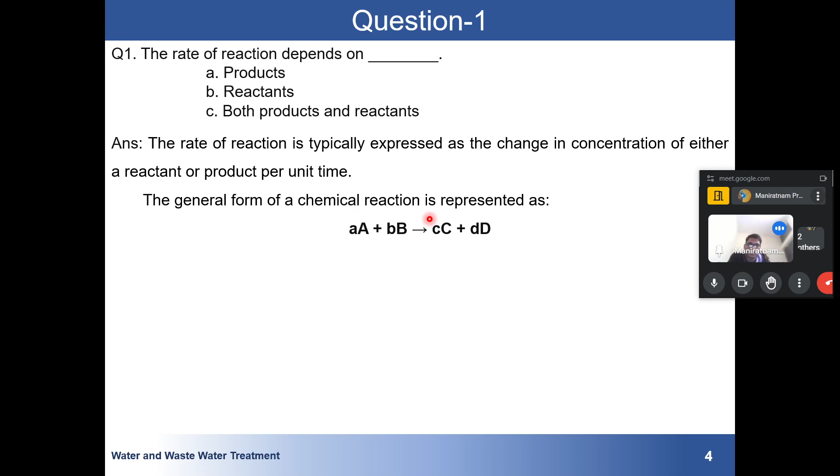So coming to chemical kinetics, the statement is that the rate of reaction is typically expressed as the change in concentration of either reactant or product per unit time. Now suppose there is one general reaction, where A reacts with B to form C and D, and small a, small b, small c, small d are the stoichiometry of this reaction. With time, A will react with B, and C and D will form.

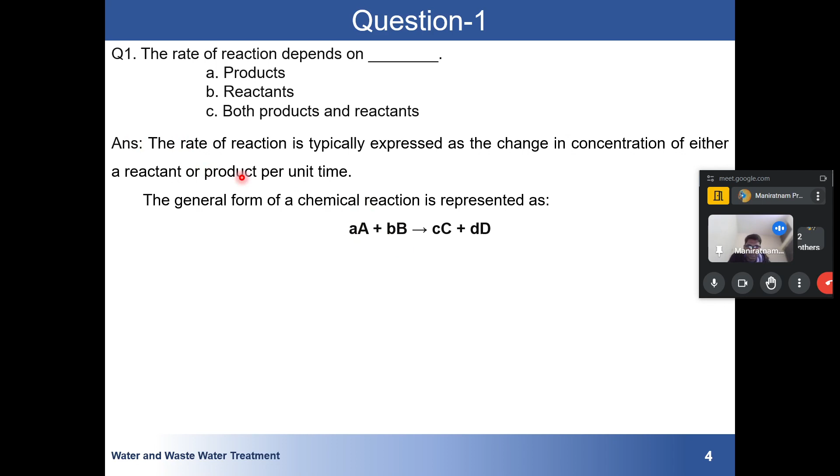So the concentration of A and the concentration of B will decrease, but at the same time the concentration of C and the concentration of D will increase. And how much these concentrations increase or decrease all depends upon the stoichiometry. The rate at which this decrease in concentration with time happens is expressed as dA/dt. So if you read the statement...

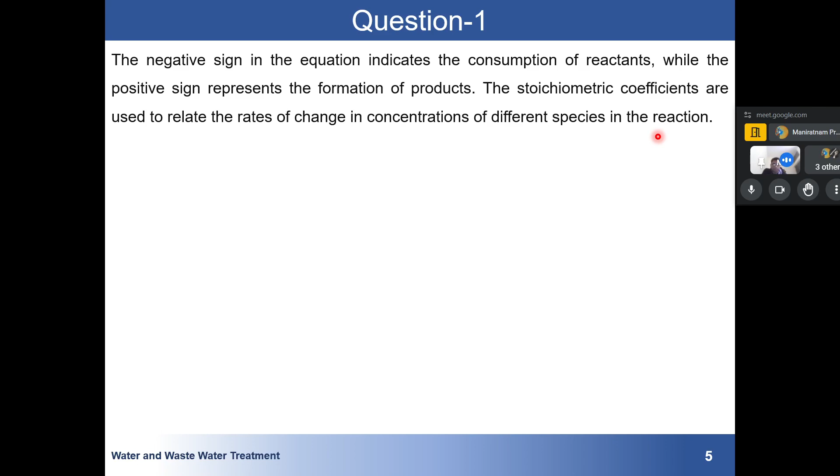As already said, the negative sign indicates the consumption of reactants, while the positive represents the formation of the products. And the stoichiometry is used to relate the rate of concentration of a species in the reaction. So how A is decreasing, how B is decreasing, all depends upon the stoichiometry and this rate. So the question: what does the rate of reaction depend upon? You can see this is a general reaction. So the rate of this reaction can be controlled by A, B, C, and D. So our correct option will be: the rate of reaction depends upon both products and reactants.

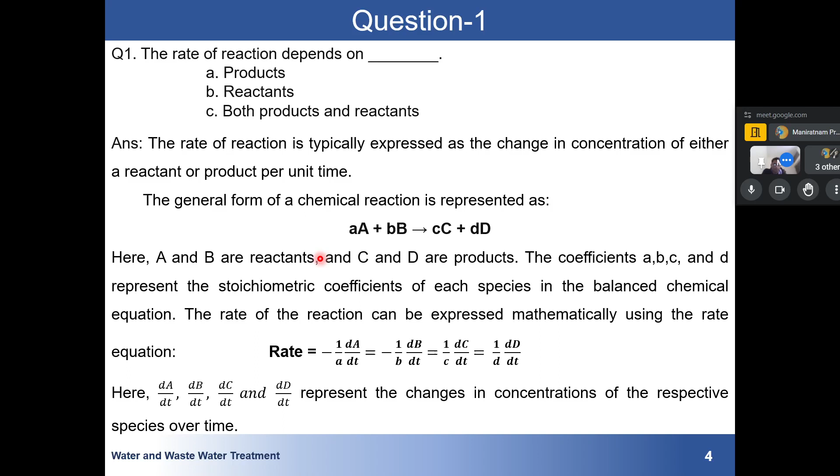So this is a simple question, but generally this is not asked. We always ask: if this is a reaction, what will be the rate of reaction with respect to capital A or capital B. But if someone says find the rate of reaction, you can use any of these four species, that is A, B, C, D, you can express it in any term. Depending upon the data given in the question, you can express the rate of reaction in any one of the species out of the given four. So the correct option for this will be C, that is, it depends upon both.

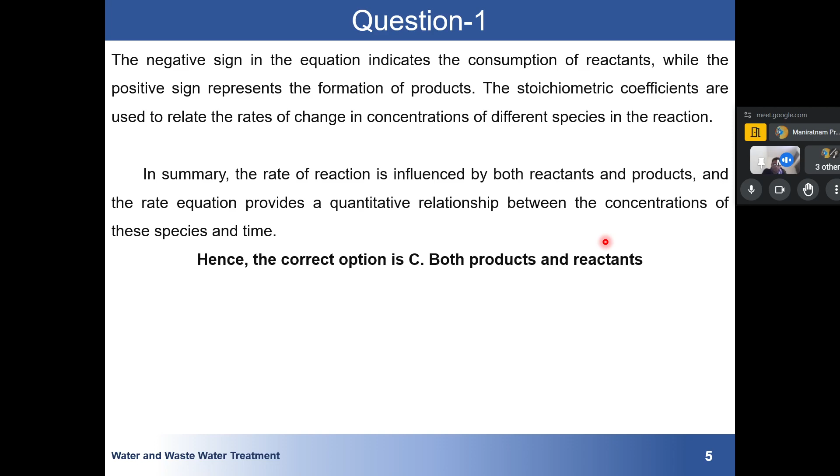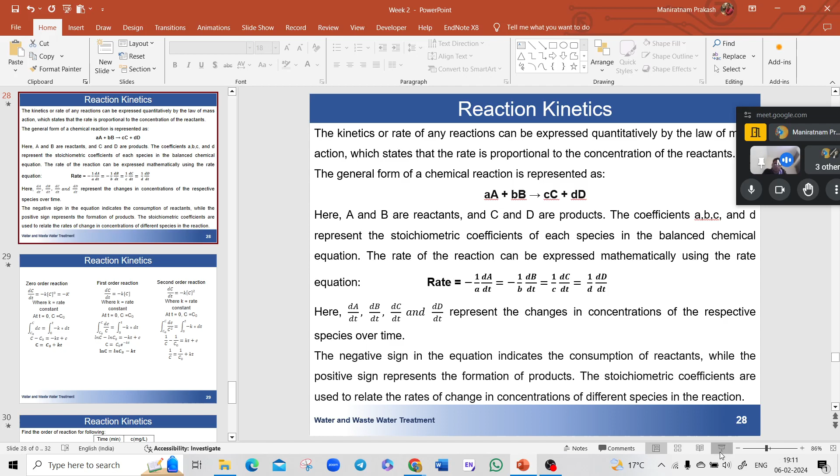Yeah, I will be explaining order of the reaction at the end, because first I'm discussing some basic questions, but I have some slides which I will be discussing at the end. Okay, since you have asked it, I will discuss it now. What is the order of reaction? Let me go to the last slide. I have already said that the reaction and stoichiometry will depend upon this.

So in reaction kinetics there are generally three. Now when this reacts with this, there will be some kind of order. Either the change in concentration will be directly proportional to this concentration, or it won't depend upon this concentration, or it will be the square of this concentration, or it can be of nth kind, that is called nth order. So for our study we generally take three kinds of order, that is zero order reaction, first order reaction and second order reaction.

I will refer one book from where I have collected all this material, all these equations. You can go to that book, and you will see that they have generalized all these things. They have not discussed zero order, first order, second order separately. They have just generalized it as nth order reaction. Suppose you have been given some set of reactions, and you are asked to find the order of this reaction. There are different methods discussed in that book. I will refer it after the end of this slide.

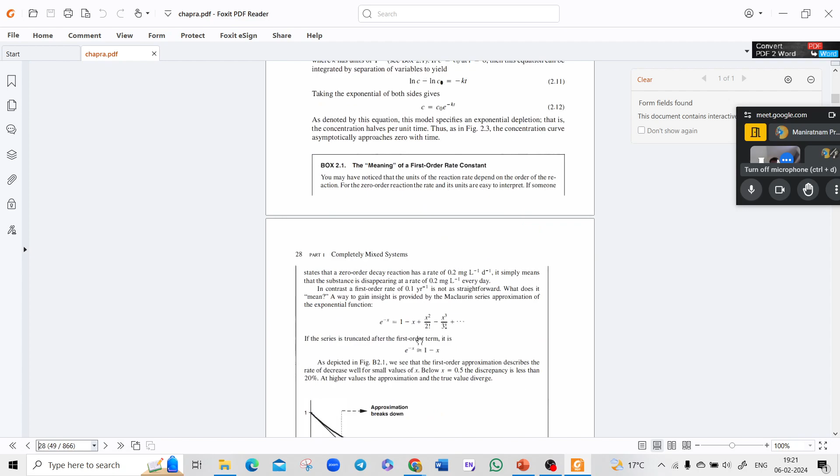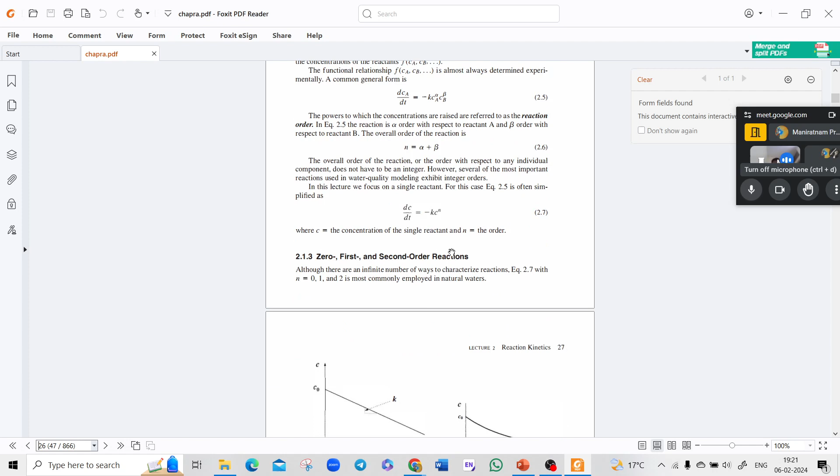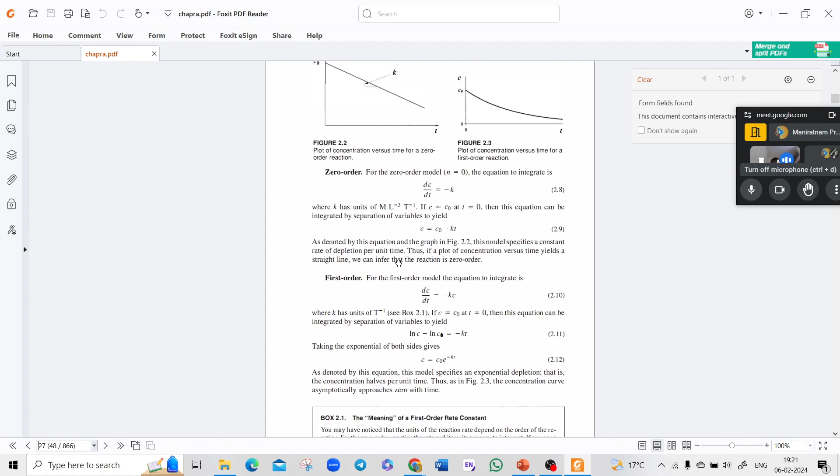So see here, first they have discussed this integration. They have discussed in the general modes. First they have discussed as usual zero order, first order, second order, because these are most common. So they have generalized the thing, and by generalizing it, they have tried to solve this by different methods. So your simple equation will be dc by dt is equal to minus k C to the power n, that is nth order reaction.

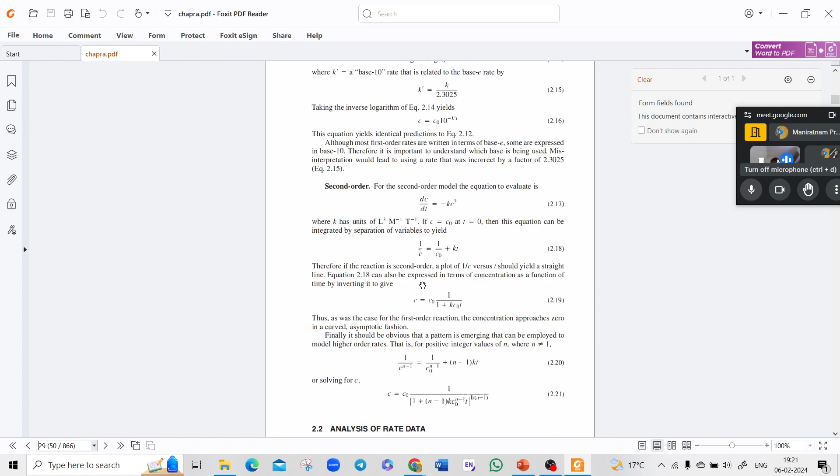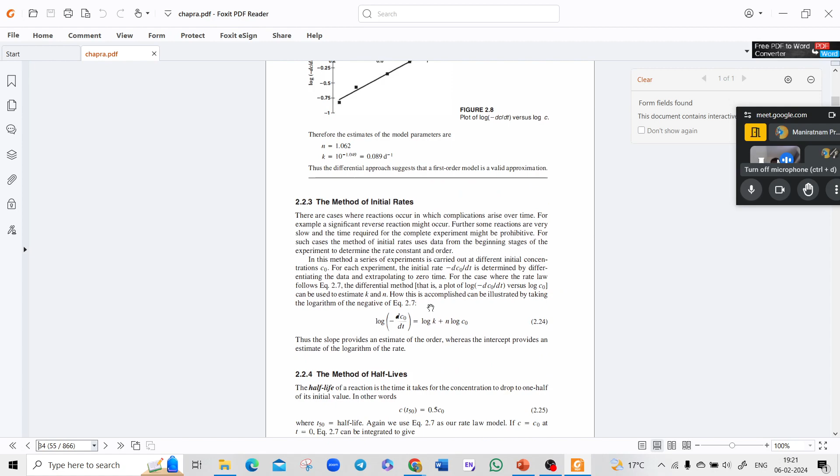So there are several methods to solve it, that is integral method, then differentiation method, method of initial rates, method of excess, so there are other methods. So if you are really interested to know more about chemical kinetics, please go through this book. This book is available on the internet. You can just type this Surface Water Quality Modeling by Steven Chapra PDF. You will get this PDF and you can read it.

So to get more control on these different kinds of reactor, that is CSTR, PFR, you should read this book, because most of the material that has been covered in your lecture has also been taken from this book only. And whatever derivation and examples I will be doing, I have also referred this book only. So whatever I am saying is present here. So it's my suggestion that please go through this book. Okay.

So now you have all three equations. There will be some general simple type of question asked, what is the equation for zero order reaction, first order reaction, second order reaction. The main question which comes is like one experiment has been performed and the data has been collected with time, that is 0, 0.5 minute, the concentration is this. So they are asking you to find the order of kinetics. Okay. So how will you solve?

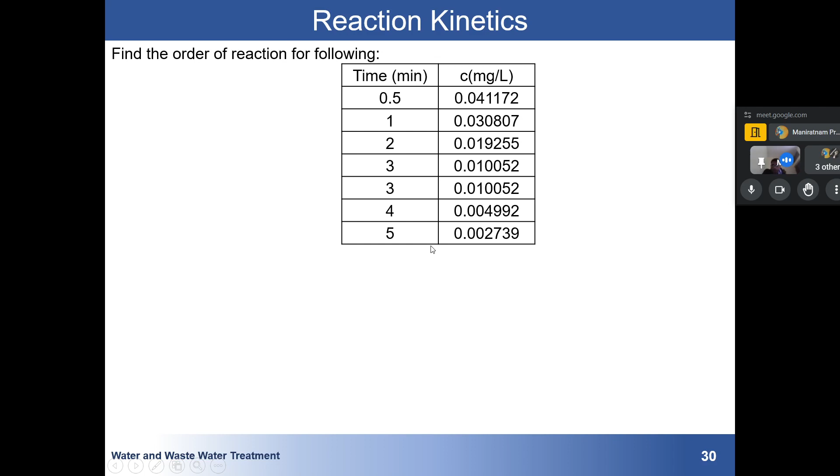So for solving this, we know that this is the equation for zero order reaction, this is the equation for first order reaction, and this is the equation for second order reaction. So I will take the help of Excel sheet. Generally in examination you won't be getting a laptop, so for how this question is solved manually, numerically, you can take the help of that book.

But suppose if you are doing some kind of research and you have done some experiment and you want to check what kind of order it is, then you can follow this method. So with time you have concentration. I know that if the reaction is zeroth order, C will be directly proportional to time. For first order, the ln of the concentration will be directly proportional to time. And for second order reaction, 1 by C will be directly proportional to time. So I will plot the graph of each one.

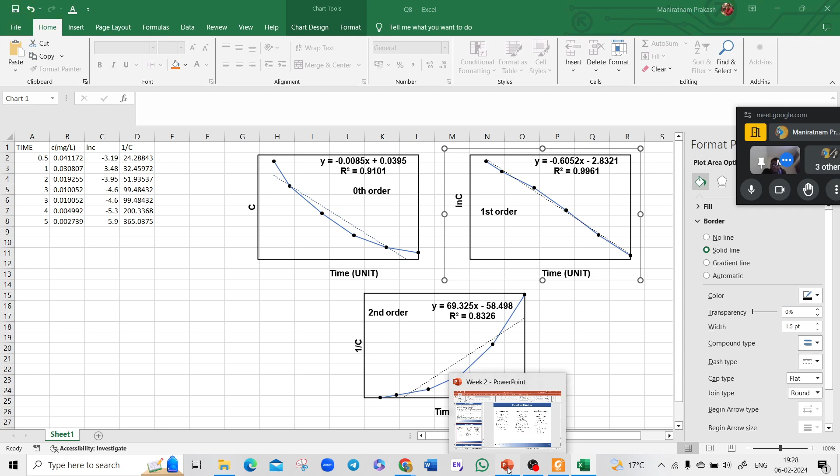So this was the graphical method, where you plot the graph and calculate the R square. Now suppose you don't have Excel and you cannot calculate R square for each one. Then what I have suggested is that you can take the help of this book. They have given some method: if you don't know the order of the equation, they have given instructions that if you do these steps, you will be able to know the order of kinetics.

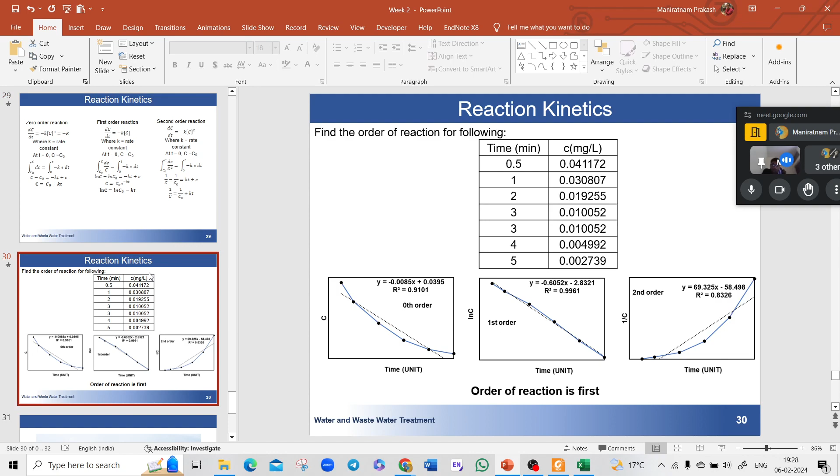So I hope this is clear to you. This was related to the first question, how to find the order of any reaction. Is it okay? If you have any doubt, you can ask now. Else, I will be going to the second question. Okay.

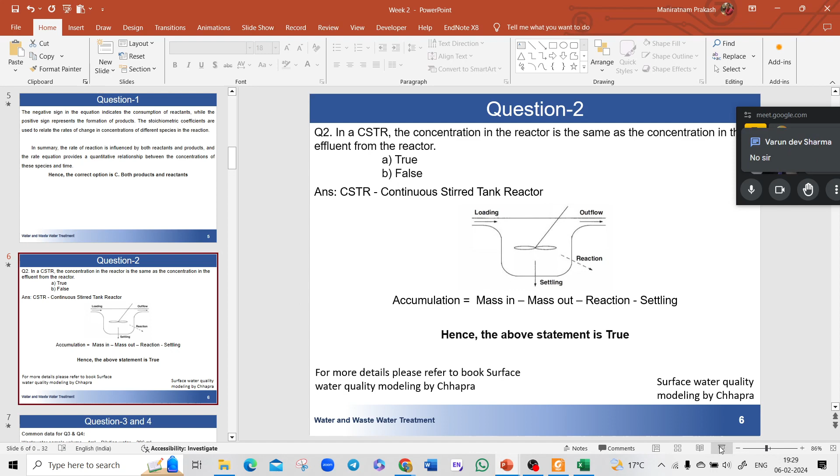So coming to the second question, that is, in a CSTR, the concentration in the reactor is the same as the concentration in the effluent from the reactor. So to answer this question, first you should know what a CSTR is. Actually this CSTR thing is very detailed. I cannot explain it in one class, because teachers take around 4 to 5 lectures to explain every concept of CSTR. But I will just give you a summary of how this CSTR works.

So CSTR stands for continuous stirred tank reactor. From the name, it already suggests that there will be a tank which will be continuously stirred. So how is this graphically represented? It is represented in this way. Consider any kind of control volume, any kind of lake. Some kind of loading, it can be wastewater loading, any kind of pollutant in the water, will go into the lake, any volume reactor, and it will be continually stirred, meaning continually mixed.

And there will be some kind of settling, and there will be some kind of reaction also. So initially there was a concentration of x, it will come here, and there will be some kind of reaction. That reaction can either increase the concentration of this pollutant or decrease the concentration of the pollutant, or similarly there can be some kind of settling.

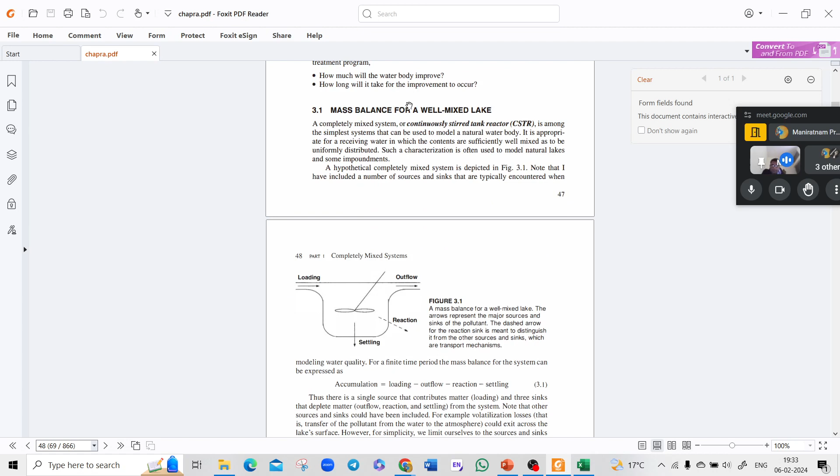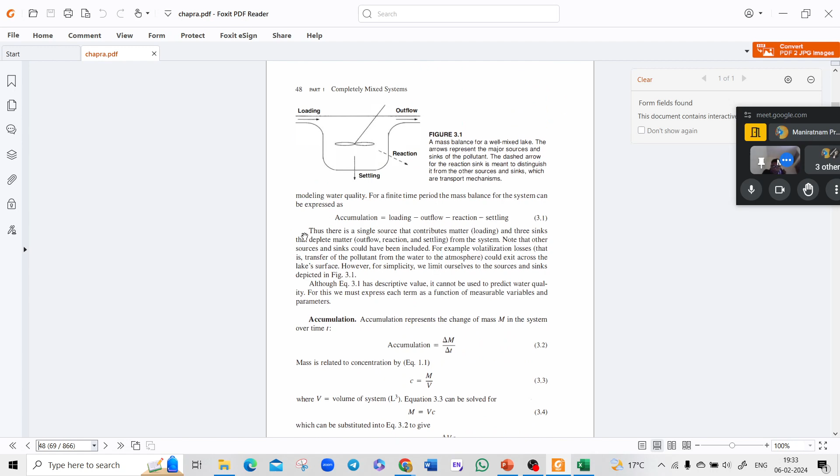For more detail, once again I will ask you to go to this book; this is discussed in chapter number 3, page 47. Chapter number 3, mass balance studies. They have started the chapter with a well-mixed lake or CSTR. You can see I have written this equation, but there are separate equations for accumulation, loading, outflow, reaction, settling, and from there the final equation is derived.

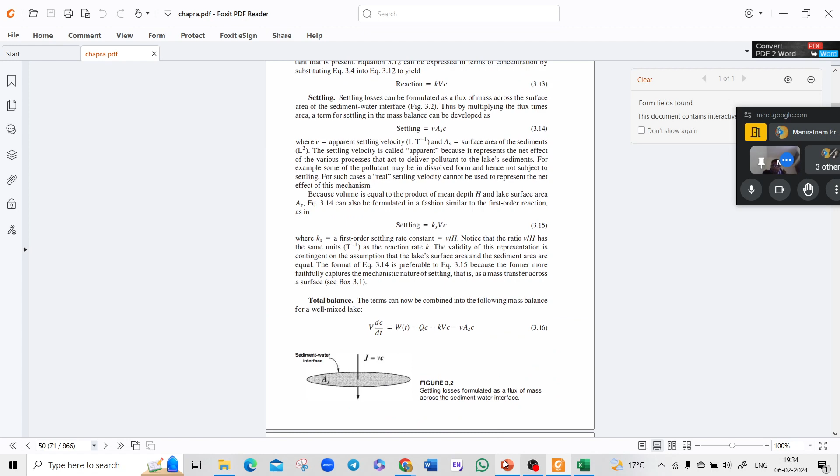The equation looks like this: V dC/dt is equal to loading, meaning mass in, minus mass out. This represents some kind of reaction, and this represents some kind of settling; the pollutant might get settled on the surface of the control volume. So again I suggest please go through this book. Okay, I hope this is clear.

So question two was about CSTR. There is one more question regarding CSTR in an upcoming slide where I will discuss more about this. Coming to the next question, this is from your DO part, that is dissolved oxygen. Till now I was discussing mass balance, how the concentration of a pollutant decreases, and what different reactors there are. There are different kinds of reactors, but till now we have only discussed CSTR, that is continuous stirred tank reactor.

Now there is another thing, that is dissolved oxygen. I will ask you to take a screenshot of this question. There is one wastewater sample whose volume is 4 ml and dilution water is 296 ml. Just remember why 296 ml has been taken; I will discuss. Then there is initial DO, DO after 5 days, and a degradation constant of 0.23 per day, and assume dilution water has no organic content. The question is to find the BOD of the water.

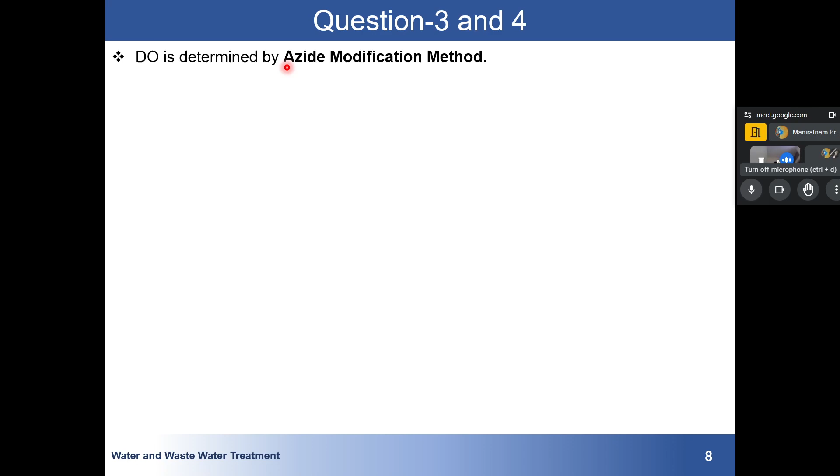So the next question is how this dissolved oxygen is measured. It is measured by the azide modification method. Its complete name is Winkler's azide modification method, but in short we just say azide modification method. I won't be discussing it in detail because this method in itself is a very long lecture, around 1 to 2 hours. So I suggest you use the internet to search on this and see how this method works. I will just discuss in brief how this azide modification method works.

Suppose you are seeing any lake that has dissolved oxygen around 8 to 10, then you can say that surface water is a healthy water body. And how is this dissolved oxygen measured? Again, this same method is used. There is another electronic method also. Nowadays there is an electronic probe which we dip into the sample and it can give you the dissolved oxygen directly. You don't have to perform any kind of experiment. But this other is an experimental thing which requires titration and all these things.

So suppose there is any kind of decrease from this normal DO value, then you can say that this water is polluted. So how can you say that a decrease in dissolved oxygen suggests the water is polluted? What is the reason this DO will decrease? The reason is the presence of biodegradable organic matter. So initially there was no biodegradable organic matter.

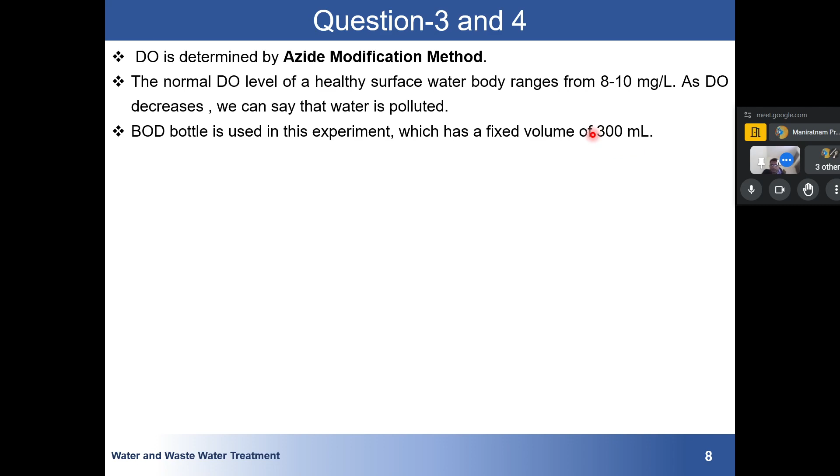So to perform this experiment we are measuring DO, just to determine biological oxygen demand. That's why this experiment is performed in a BOD bottle that has a fixed volume of 300 ml. And this bottle looks like this. So in the question, we have taken 4 ml sample and 296 ml of dilution water. To perform this experiment we need 300 ml of solution. That's why I have taken 4 ml of sample and I have diluted that sample.

But why have I diluted? Because that sample may contain a high amount of organic matter, so I won't be getting a good result. We know that the dissolved oxygen present in my sample will be less than or equal to around 8, and with time it will obviously decrease. Suppose it is initially 8 and it has decreased to 6. Then only 2 milligrams of oxygen has been consumed, so we can say that the organic matter present there was very less.

But now imagine you have a very large amount of organic matter in that sample. Within 1 hour or 2 hours, or within 1 minute, this 8 will come out to be zero. And we perform this experiment for 5 days. Why 5 days? Because this is a standard method, and the reason is that within 5 days 60 to 70% of the organic matter will be degraded. So that's why we have chosen this 5 day experiment, and it is done everywhere.

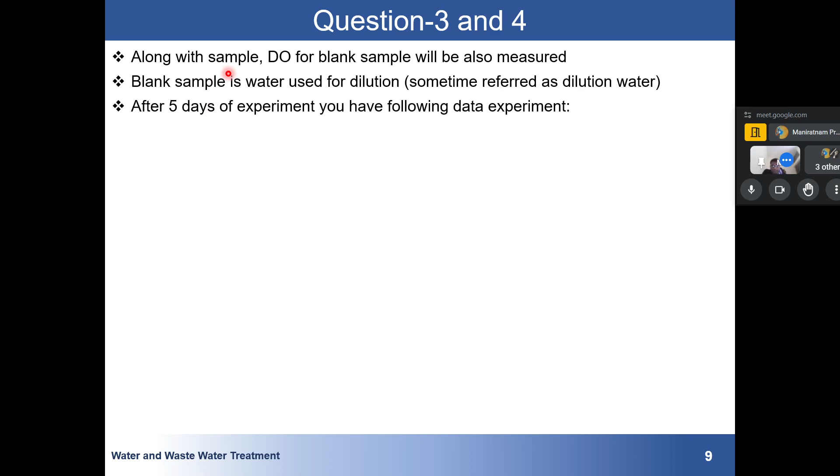So the blank sample is the water used for dilution. Sometimes it is also referred to as dilution water. So after 5 days, again you will take out your samples, that is sample and blank, and you will perform the experiment.

After 5 days of experiment, you have these 5 data: initial DO of the sample, DO of the sample after 5 days, initial DO of the blank, DO of the blank after 5 days, represented as DOi, DO5, DO blank initial, DO blank 5, and the dilution factor. So the BOD coming from this experiment will be in milligram per liter as oxygen, and the equation will be what I said.

You have initial DO and you have the DO after 5 days. What is this equation giving? There was some initial dissolved oxygen, X amount of oxygen present. After 5 days, all the organic matter was decomposed by the oxygen present in the system, so the amount of oxygen will decrease. You will get some value of DO5, and the difference will give you the BOD, meaning how much oxygen has been consumed in degrading that matter.

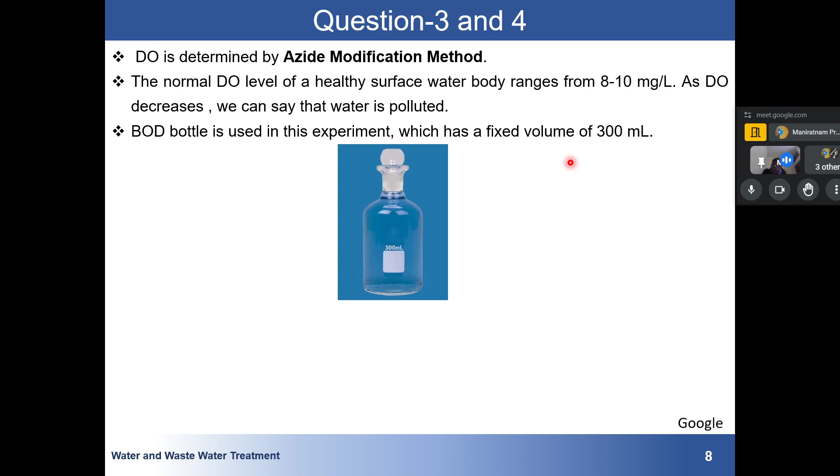As soon as you add the starch indicator, the system will turn blue, and we start titrating it with a reagent called hypo, sodium thiosulfate. In general terms we call it hypo. Whatever amount of hypo is consumed in achieving the end point of this reaction, from blue to colorless solution, will directly be the DO of the sample. That's why 300 ml is chosen in a specific way.

So after 5 days you have this data. You can put your values in this equation and calculate the BOD of your sample. Coming to our question, the initial DO was 7.65. DO after 5 days is 4.2 milligram per liter. Remember, it is written milligram per liter, and it will be as O2. There is a separate derivation for how we derive this equation.

So DO after 5 days is 4.2 milligram per liter, and there was already a statement that the dilution water does not contain any organic matter. So the DO of blank will be 0, and the dilution factor will be 300 divided by 4, that is 75. So I will put in all the values, and I will get the BOD.

After BOD, I forgot to mention there will be a 5, BOD 5, because I am calculating BOD after 5 days. Similarly, there will be a BOD after 7 days. Someone can also calculate the DO after 7 days, and he can report the BOD 7. Okay, and so the answer will be 258.75 milligram per liter as oxygen.

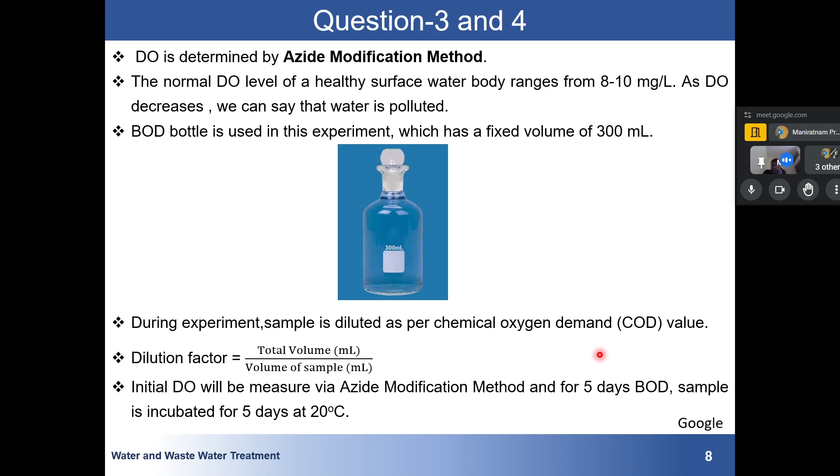So there has been some method developed for calculating this BOD in a theoretical way. You have to do the experiment, you have to find the BOD 5 value. Then with the help of this BOD 5, you can calculate the ultimate BOD.

So I will derive what kind of equation is used for estimating this BOD. Everyone is familiar with this concept, that degradation of organic matter is according to the first order reaction. So if it is a first order reaction, you can directly write the equation which I have said, that C is equal to initial concentration into e to the minus KT. But you can derive it also.

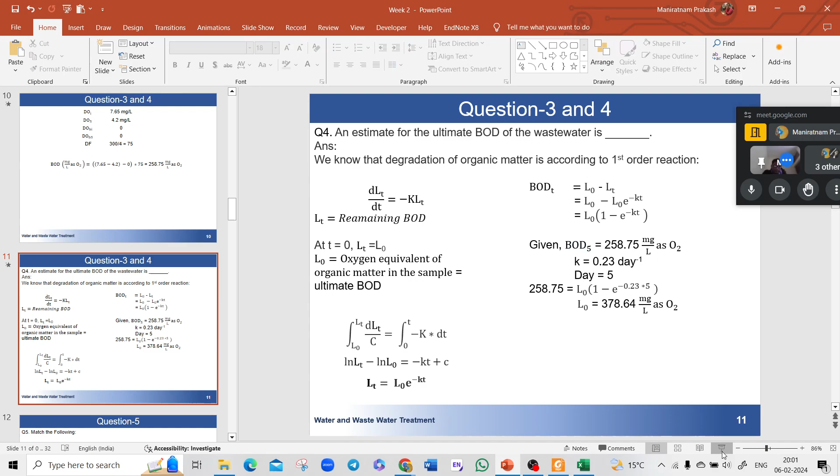So I have already calculated the BOD after 5 days. Just 1 minute. After 5 days from the experiment it's come out to be this much, and K is also given. This K is the degradation constant, or simply rate constant. Okay, and for this equation time will be 5 days.

So I will be putting all the values here, that is 258.75. This was calculated experimentally. I have to calculate L naught. After putting all the values, you will be getting L naught is equal to 378.64 milligram per liter as O2.

So if you perform this experiment for a very long time, say 1 month, 2 months, which is very tedious work, because you have to wait for 1 month and there might be some other problem, you won't be able to achieve this BOD, but you will be near to this. Because when you perform your experiment, you have this equation.

So after a long time, this will go to zero. But theoretically, yeah, experimentally, there will be some miss. It's taking a very long time to achieve this term zero. So experimentally we cannot calculate, so we have calculated it theoretically. Theoretically it is nothing, just dilution factor into this initial DO.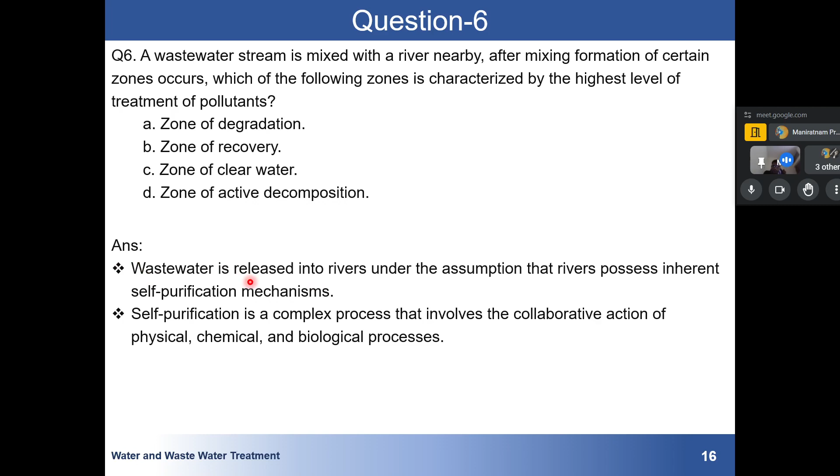wastewater. So coming to the different zones, there will be some discharge. Some factory or someone is discharging wastewater.

So for some initial length of the river, consider this is a river and the flow is from this direction to this direction. So that initial zone where the wastewater has been discharged, or dumped, will be called the zone of degradation. And after some time there will be the zone of active decomposition. What is this zone of degradation? I will explain those things.

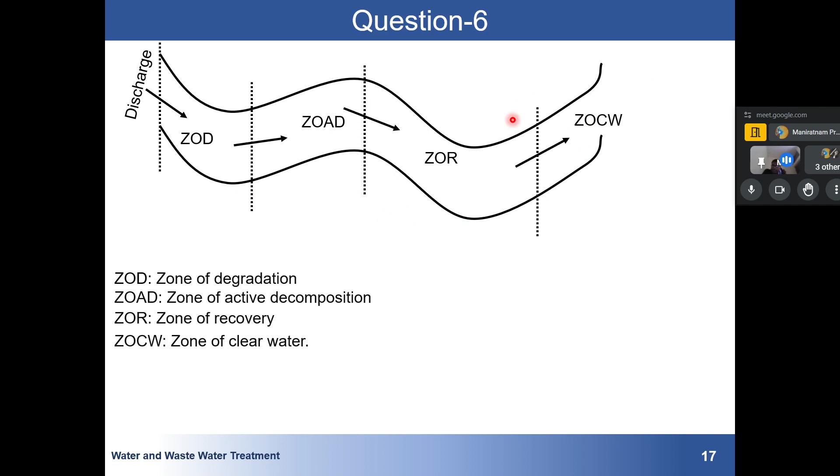After some time there comes the zone of recovery. Here, whatever loss there has been, the river will try to recover that. And finally the zone of clear water, meaning even though we have discharged, we have dumped it, after some length, say maybe 5 kilometers or 2 kilometers, you will get clean water. So the concept of these different zones is explained via the oxygen sag curve.

Before discussing the oxygen sag curve, I will discuss these different terms. What is this ZOD, that is, zone of degradation? In this condition the water will be dark and turbid because you have already dumped your wastewater. And there is something called rate of deoxygenation and there is a rate of reoxygenation.

Deoxygenation means this wastewater will contain some organic matter. This organic matter will start consuming the oxygen present in your system. So when there is a decrease in oxygen, it is deoxygenation. And we know there is the concept of aeration in the river. From the atmosphere oxygen comes in contact with the water and it gets dissolved. So that is called reoxygenation.

Not only oxygen from air; we know that algae are present there, so they also do photosynthesis and produce oxygen. Remember the concept of aeration. This aeration will again provide some oxygen. But the amount of oxygen coming into the system is very less as compared to the amount being consumed by your organic matter. So the characteristics of this zone of degradation are that water is dark and the deoxygenation is very high.

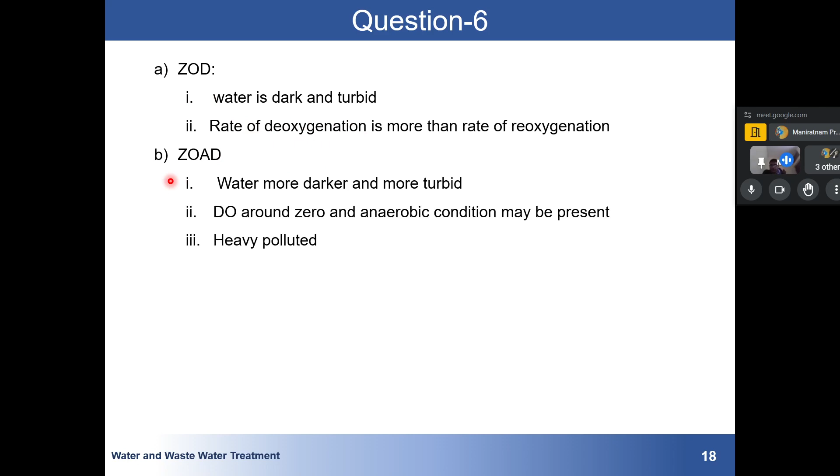The second is called the zone of active decomposition. The organic matter which was present in the system will start consuming oxygen first. With degradation the water will become darker and more turbid, and the organic matter will consume all the oxygen which was present there. This will make the river have DO equal to 0. And anaerobic conditions may be present there.

So what is anaerobic condition? First you should know what is anaerobic condition. Aerobic condition is the consumption of free oxygen, and anaerobic condition is consumption of oxygen which is attached with something like SO4, NO2, something like that. All the free oxygen has been consumed, so organic matter will start to extract oxygen from sulfate, oxygen which is not free. There is a very wrong conception that aerobic is in presence of oxygen and anaerobic is in absence of oxygen. This is a wrong definition.

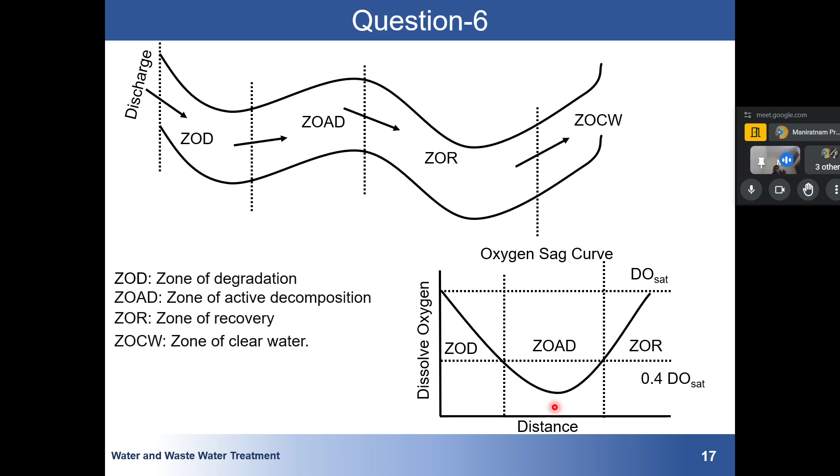You should look at the derivation; this is a very nice curve, and the modeling and derivation are really nice. This is called critical time. I have plotted it with distance, but obviously the decrease in oxygen has happened at some time, and you can find this critical time. The river will have some velocity, or you can say some discharge. You know the discharge, you know the area, so you know the velocity, and you know the distance. So you can calculate at what time, at what distance, what dissolved oxygen is present in your system. So you should look into this.

Okay. So the question was which is the most polluted. The correct option is the zone of active decomposition. I hope this is clear.

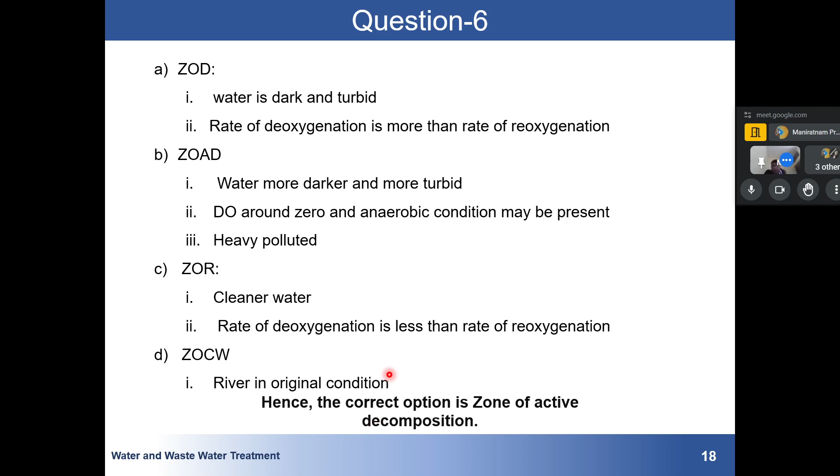Coming to the seventh question, this is about BOD. There are two kinds of BOD, that is the carbonaceous stage and the nitrogenous stage. Conversion of organic matter to O2. Okay. So what does this organic matter mainly consist of? That is carbon. This will be CO2, not O2. Conversion of organic matter to CO2. This type of mistake.

So all the carbon which is present in your organic matter will first get converted into CO2. That is the first stage of BOD. Experimentally we only find this carbonaceous BOD. Finding the nitrogenous BOD is a different method. The method I was talking about, the azide method, generally finds only this carbonaceous BOD.

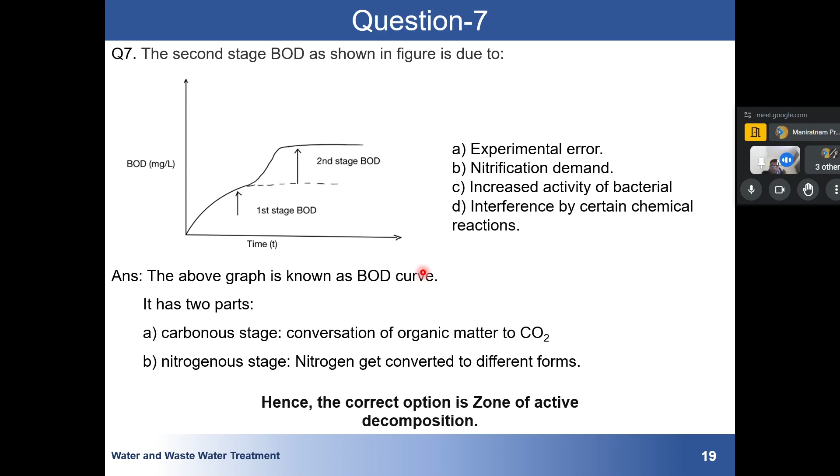So the first step, where the conversion of organic matter into CO2 happens, is known as the first stage of BOD. And the second stage, in which nitrogen gets converted into different forms, is known as the second stage. So the question is, the second stage of BOD in the figure is due to nitrification demand. So again, sorry, there is a mistake.

Hmm. Okay, so I hope this is clear to you.

So to read about this BOD and COD, I will be referring you this book. I hope you might have read it, but if not, Chemistry for Environmental Engineering and Science by Sawyer and McCarty. This is a very famous book, Sawyer and McCarty. Whenever some kind of experiment is done, people refer to Sawyer and McCarty.

So after chapter number 11, the experimental part starts. Here you can see from basic concepts of quantitative chemistry to color, standard solution, turbidity, and chapter number 22 is dissolved oxygen, around page 624. So biochemical oxygen demand. I will suggest you read this book starting from here. First dissolved oxygen: in a detailed way, what kind of dissolved oxygen different water bodies have, and how the variation of DO affects our system. Then they have discussed BOD.

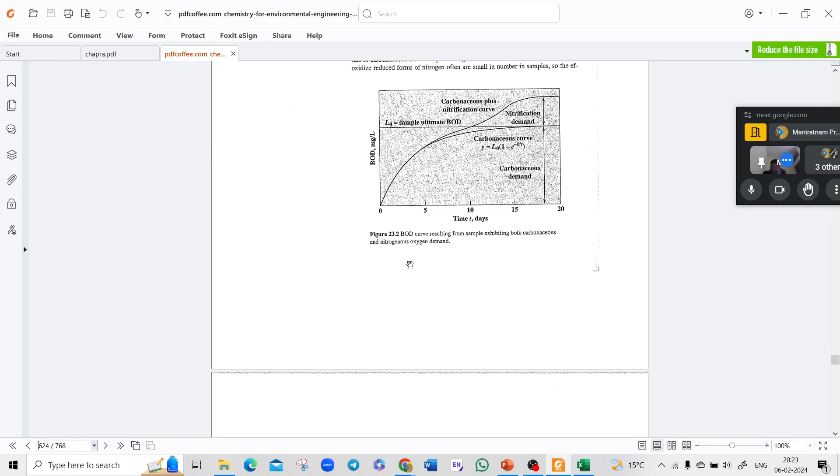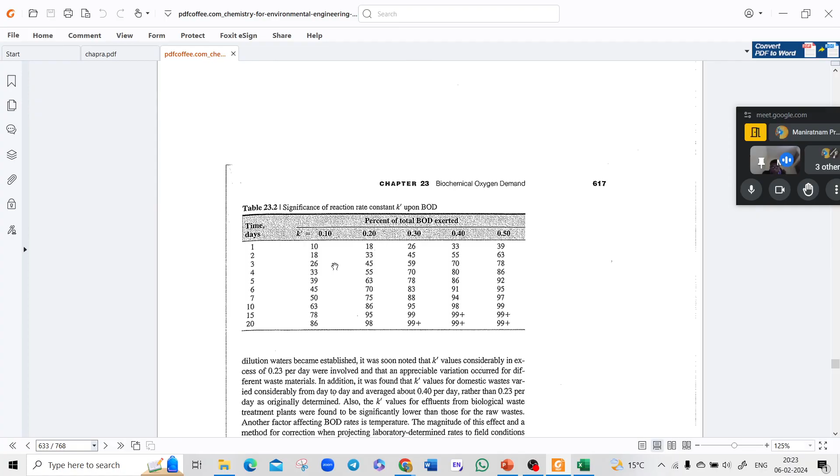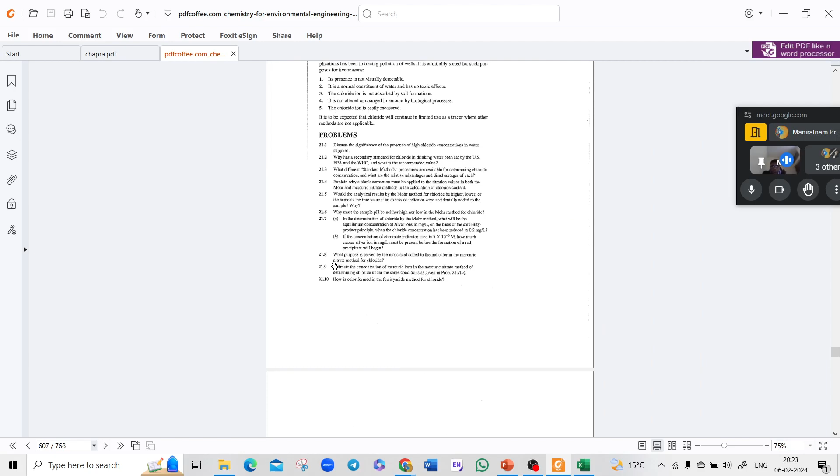So I was telling you one thing, that we dilute our sample as per our value of chemical oxygen demand. That is also given in this book. Whenever we do experiments for wastewater, we refer to this book only. If you go to chapter 21, I'm not going to search it, but when you read this book you will find for what value of COD how much dilution you have to do for finding your dissolved oxygen.

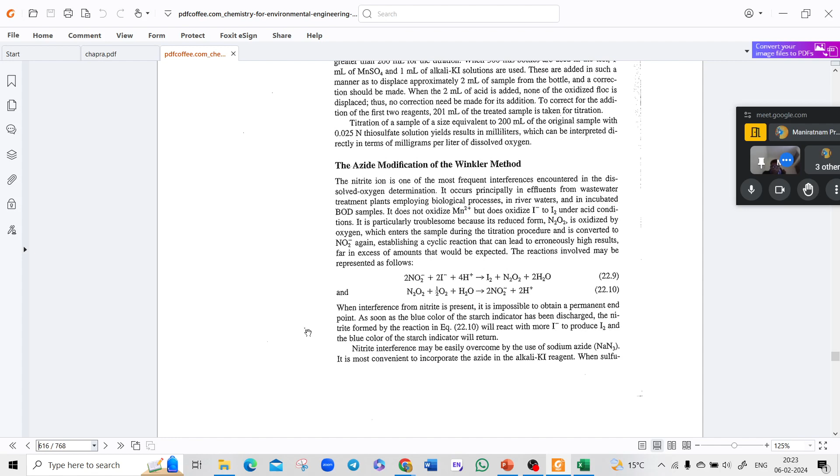So please make sure, this book is also available on the internet. You can download it by searching Chemistry for Environmental Engineering and Science by Sawyer and McCarty PDF. You will get this PDF. Okay. So till now all the questions were related to BOD and COD.

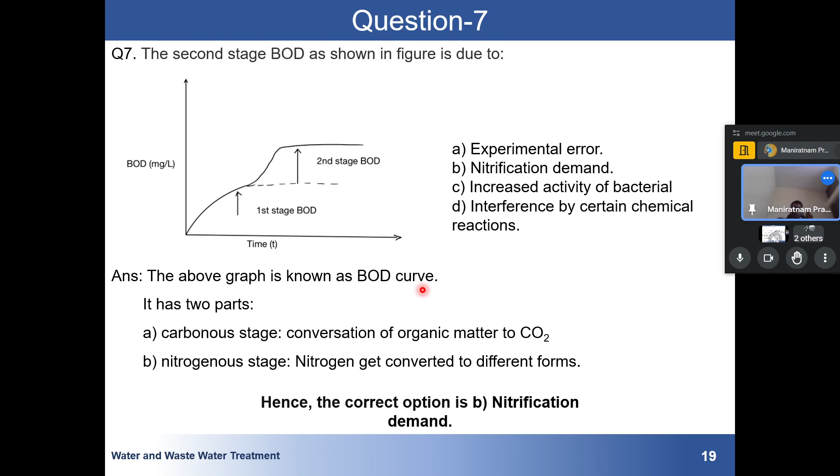So till now I was discussing dissolved oxygen and BOD. These are wastewater parameters. Both DO and BOD are wastewater parameters. These are not used as drinking water parameters. Okay. So there was one question left.

This match the following, where you have to match different kinds of reactors out of these three options: batch reactor, PFR, CSTR. I will discuss the batch reactor, PFR, that is plug flow reactor, and CFSTR, that is continuous flow stirred tank reactor. And the options are reactors in which fluid flows in different ways. So first I will discuss this.

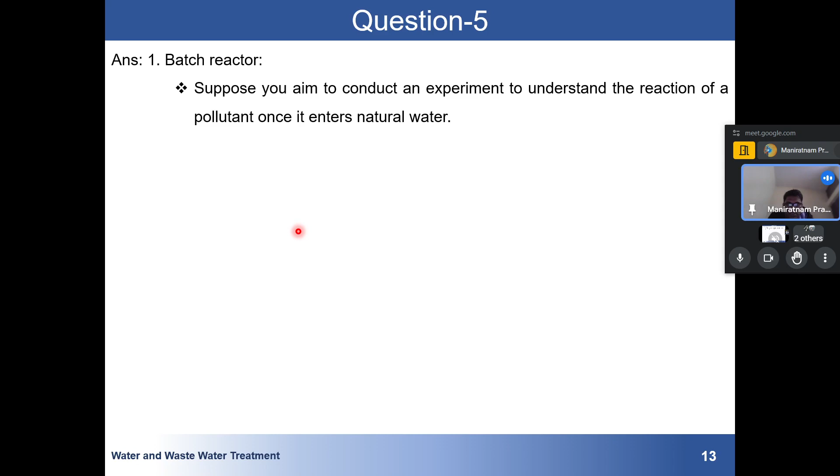What is this batch reactor? You take one vessel and you add some. I will show you a photo. This is a batch experiment, for a batch reactor. What I have done, I have just taken one beaker, added some water and some chemical, and done some experiment. With time I have taken some samples. The example which I showed you for finding the order of reaction, that reaction was done in batch, in a batch reactor. So this is a batch reactor.

So this is the most simplified method of doing an experiment. Simply, you take one beaker, you add some water of your concern, you add some chemicals, and with time you take your reading. How do we take readings? With time, using a stopwatch, and this is a magnetic stirrer.

There is one magnet kept in the middle of this system, and it is rotated at, say, 50 rpm, 100 rpm. Generally the most common rpm used in experiments is 110 rpm. So it will be kept here, it will be rotated, and for taking readings we use some kind of filter. We take out a sample and we store it in storage.

Sorry, we store it. So this is the point about this batch reactor. This is the most simple, straightforward method, involving a pollutant in several vessels. So you can see that for the same experiment I have taken different concentrations. So the vessels are this.

So this system is known as a batch reactor, and by monitoring the concentration of each bottle over time you can gather the data relationship between time and concentration, which I have shown you earlier. So this was done for the batch reactor. Okay. So if someone asks you what a batch reactor is, you will say that we take vessels, we add water of our concern and chemical, and we take

readings with time. So the point to be noted here is that there is no kind of flow here. All the water is in here only. If you remember CSTR, what was happening? The water was coming into the system, then it was going. But here there is no such thing. Water is already present here. With time, I am just taking readings.

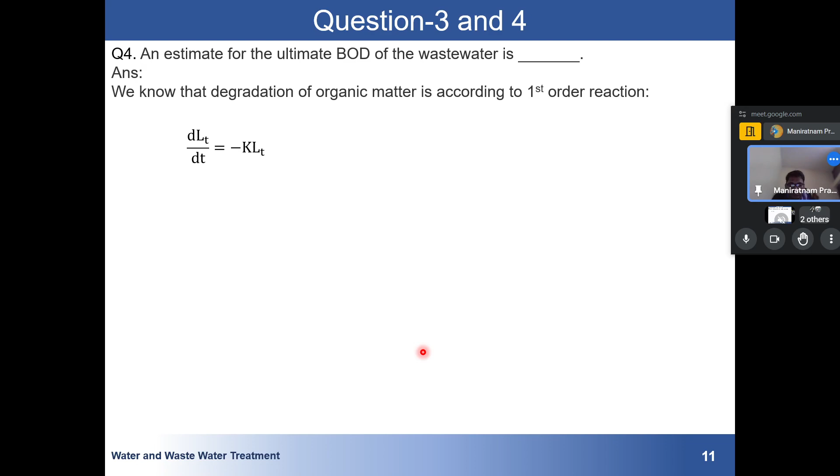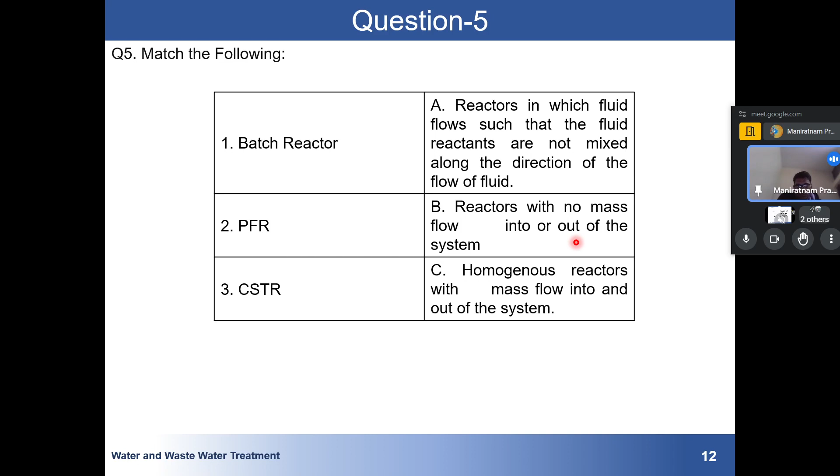So if I wanted to match which of the following, there are three options. So the batch reactor will be matching with these two. Reactor with no mass flow into or out of the system, means that the system is there. Only you are taking readings at different times. There is no incoming, no outgoing. Is that clear? I hope it is clear.

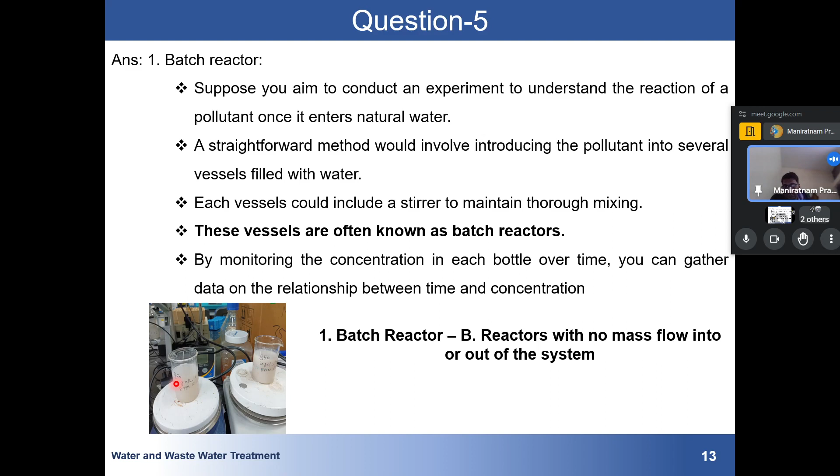So the first will be matching with the reactor with no mass flow into or out of the system. Whatever is there, it is present here. With time you will be taking the reading and noting it down in an Excel sheet or in your copy. The second is the plug flow reactor.

Whatever I have written down here, all the statements are taken from that book only. I will try to explain each and everything to you, but if you are still not clear about those things, you can go and check that book. In that book, everything is described in a more advanced and more detailed way.

The plug flow is one in which advection dominates. So I will show you first what plug flow is. This is a representation of plug flow. Just remember what a plug is. Suppose water is flowing from A to B, and there is one middle point. Suppose water is moving from A to B, and there is one middle point C.

So you will be sitting at C and you will be checking what is happening at C. You are not concerned about the water that is before C and what is after C. You are just concerned about what is happening at that point C. So it is kind of a plug. A plug of water is coming at C, you are analyzing that, and that is going away. Again a plug of water is coming at that point, and again that is going. So you are just concerned about that and nothing else.

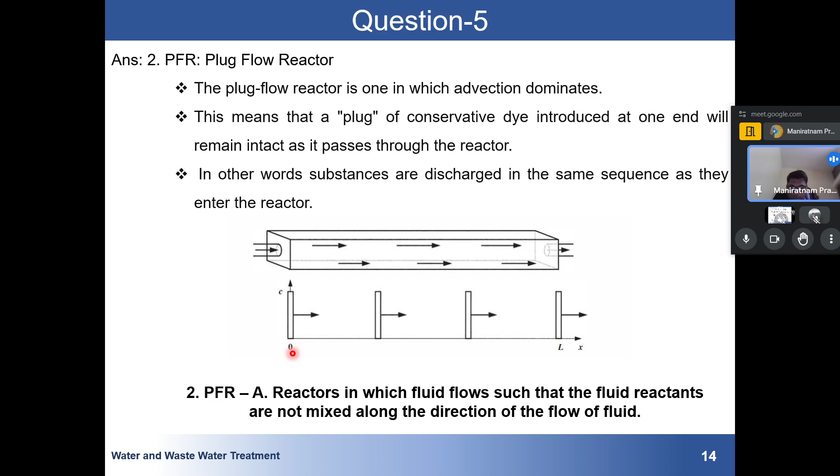So you can see. So the second option matches: this is a reactor in which fluid flows such that the fluid reactants are not mixed along the direction of the fluid flow.

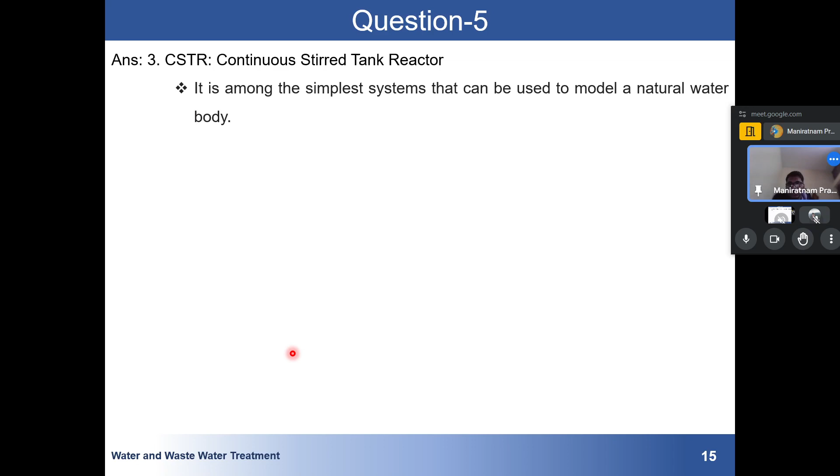Coming to the second thing that I have already discussed with you, this CSTR, which is the most common way to model our lake, river, any kind of experiment. The batch experiment is the most simplified experiment. Generally, very little research is there on PFR, but most of the research going on, most of the questions which come, are about this CSTR or this batch experiment.

If you are appearing for the GATE exam, then questions related to the CSTR and PFR come. So for these different kinds of numericals, you should see that book, so you will get a brief idea how these different kinds of reactors work. So coming to this CSTR, it is among the simplest systems that can be used to model a natural water body. So consider this lake as a natural water body.

So obviously we want to see how a pollutant, or how a wastewater, is behaving in it.

Just 1 minute. I have got cramp in my leg. Just 1 minute. So so

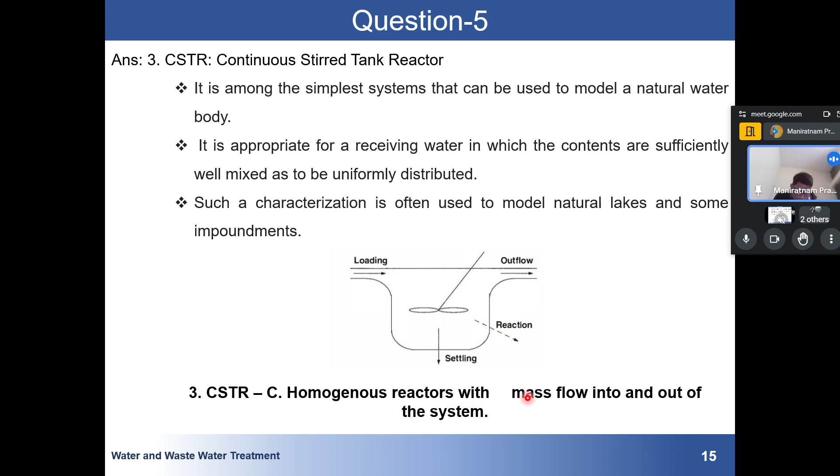Okay, so coming to the last portion, I have already discussed question 6 and question 7. Again, there is one interesting question which is a very long question. In a batch reactor, again see batch reactor, an experiment was run in the lab to remove propionic acid. It is a common organic acid that is used in production of various chemicals. As soon as you see propionic acid, this is an organic acid, so the first thing that should click is that it will follow a first order reaction. And a first order reaction follows the equation C equals C naught e to the minus kt.

By reading the question you should start imagining what is going on. I'm just discussing it, and remember similar types of questions are also given in your assignment. If you are doing the NPTEL assignment, there will be a final exam. So this type of question you can expect in your examination.

Okay, so the initial concentration is 21 milligram per liter. Concentration after 30 minutes is 3.5 milligram per liter. It is already written that it is first order, there is no need to assume. Most organic things decompose via first order only. If this was not given, I could have assumed it is a first order reaction, and assume a steady state. Steady state means whatever water is coming into your system has achieved equilibrium, meaning the concentration is not changing now. I have said that dC by dt will be equal to something.

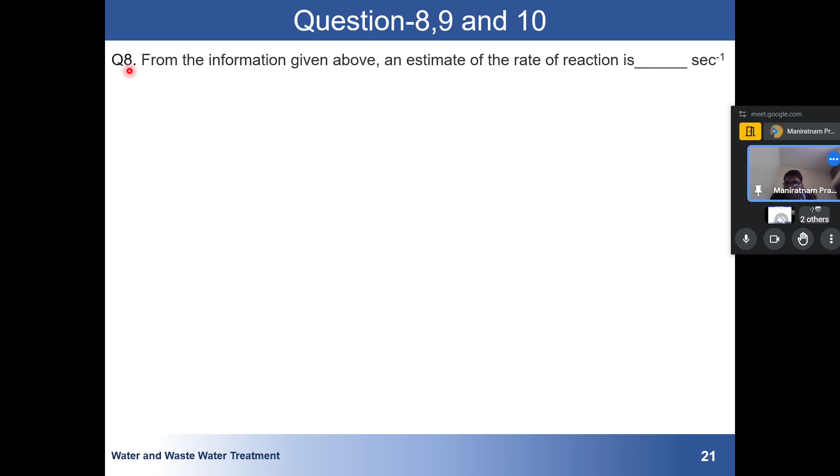Okay. So coming to the first, this is a common question for question number 8, 9, 10. The initial concentration is this, concentration after 30 minutes is this. First order you have to follow. So you have to answer some questions. For the given information, estimate the rate of reaction. So this is a very simple question: as it is a first order reaction, again I will follow the same method, and I will be coming to this equation. You have to find the rate constant, that is k.

Okay. So if you have several data, then you don't have to do this kind of work. You don't have to integrate, you can just plot the diagram, compare this equation with this equation, and say what the value of the rate constant is directly. But I was having only a single data, that is initial data and final data at 30 minutes, so I will be using this equation.

Just remember one thing. Initially when I was discussing the rate constant, this thing. So just remember, for each and every order of reaction, the unit of K is different.

Sorry for this inconvenience. Am I audible? Sorry, actually I don't know what's happening.

But just remember, for each and every order of reaction, the unit of K is different. Here the unit of K is milligram per second, mass per time. Here the unit of K is per minute, per time. And here the unit of K is 1 divided by concentration into time. Concentration will be in terms of mass only, mass into second.

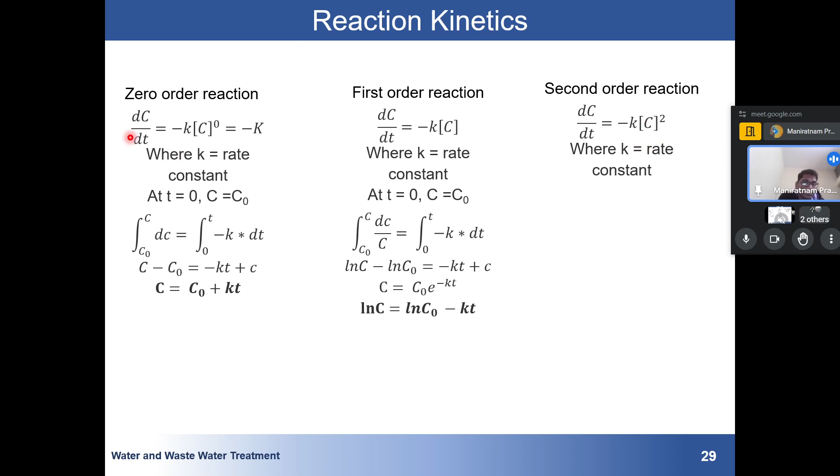Just remember this thing. And generally concentration C is referred to in terms of milligram per liter, or mole per liter, or molarity. So depending upon the unit of C, the unit of K will change. Just don't assume that everywhere K is the same. I am writing rate constant, but at the same time the unit is different for all these three. Okay.

So for the first question where they asked to find out K, you will put the values and you will be getting your answer as 0.0597 per minute, that is 9.95 into 10 to the power minus 4 per second. Okay. So coming to the second question. Now they have used the same data but for a plug flow, that is, calculate the hydraulic retention time. Hydraulic retention time is nothing but the time for which, how do we define hydraulic retention time?

Residence time means you have your batch reaction. You have your control volume for how much time that reaction has happened, and after that you have taken out your sample. That is hydraulic retention time. If you are not clear with the definition, you can refer to that book.

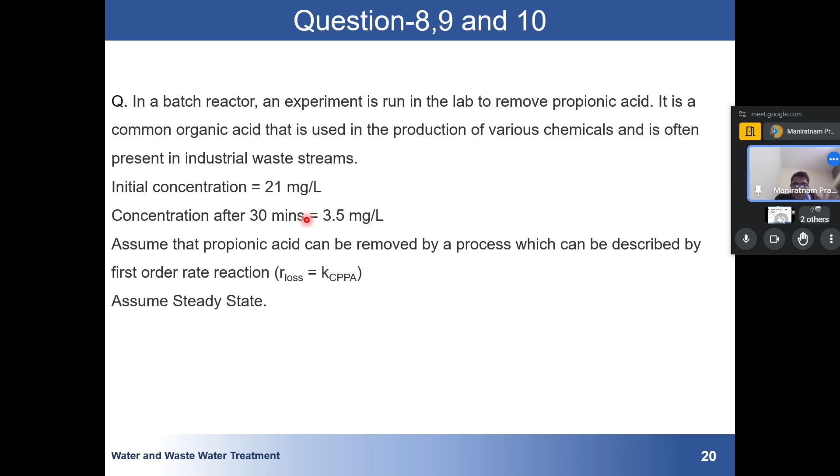Now they have changed this system, they have just changed another data: the final concentration is now 1.5. So in this equation C is 1.5, C naught you already know, that is 21. They are saying that the initial condition is this. So you have to find t. So either you can use this equation. That will be a little bit lengthy work, because if you are appearing in some examination, you can do that directly.

But suppose this is a theoretical exam, and they have mentioned plug flow. Plug flow has some conditions: it follows advection, the concentration for a particular time will be the same, such kind of thing. So depending upon that, you have to derive a formula for concentration variation in PFR. Because in PFR we give importance to concentration with distance. If you have seen this graph, see here concentration, and we have given importance to x. Obviously this water will be flowing with some flow rate. Suppose the velocity is v; if you are provided with the distance, you can find the time, that is distance divided by velocity.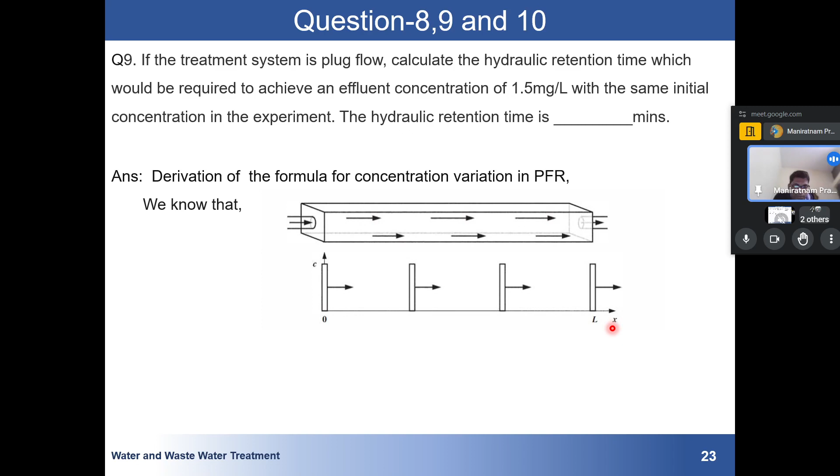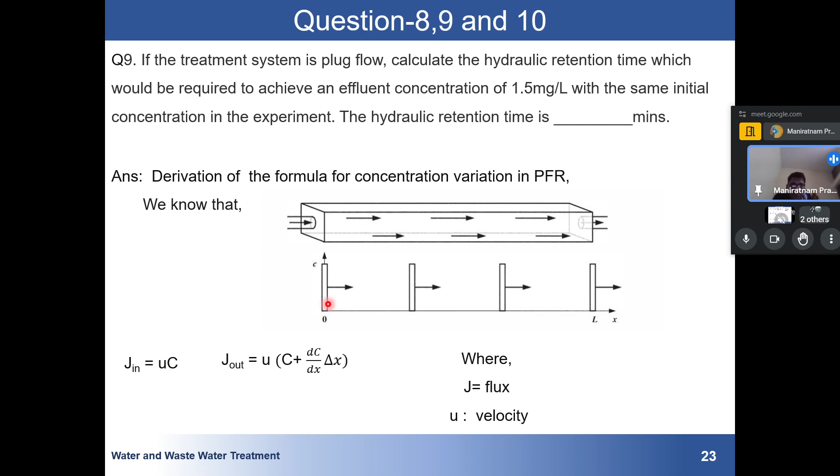Okay. So two terms are defined, that is flux. Flux is given by velocity into concentration. If you are not familiar with this equation, no problem. Everyone is familiar with flux. You must have read it in class 12th. What is flux? Water flowing through a particular unit area, something like that. So for PFR we derive two terms, that is flux in and flux out, and it is derived in this way.

So remember, mass in is equal to discharge into concentration. What is the unit of discharge? Discharge has unit of meter cube per second. And what is the unit of concentration? It is milligram per liter, or milligram per meter cube. So meter cube will get cancelled out, and it will be milligram per second. So that is also mass. So the unit of this thing is similar to mass in.

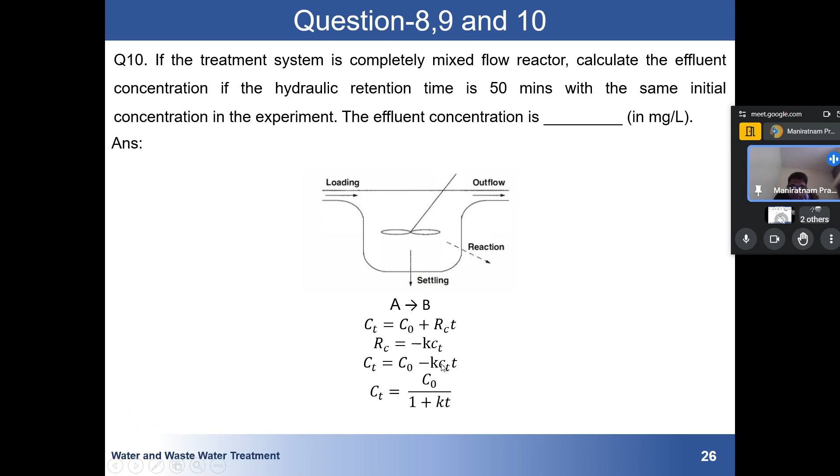And this rC, we know for a first order reaction, will be minus k C naught, because it depends on the initial concentration. So I will put this value of rC here. Sorry, there is one mistake. This will be rC, not rC naught; this will be r of Ct. Okay. I will put that value, and after bringing this term to this side and taking Ct common, you will get this equation.

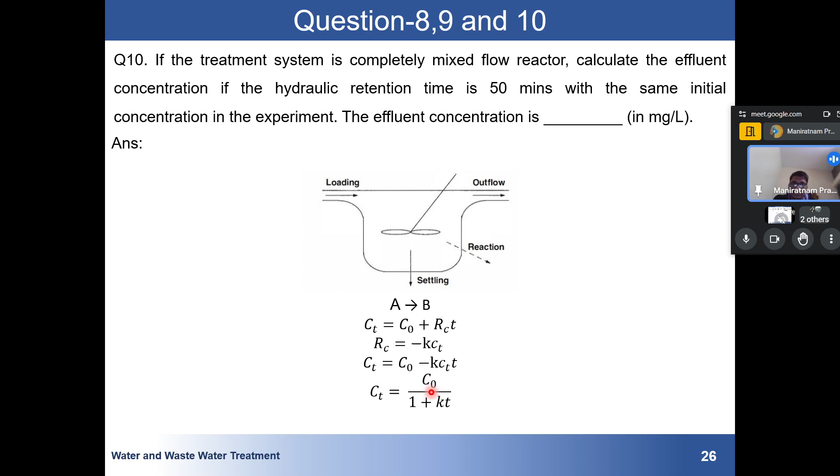There are many things going on in this reaction; we cannot assume anything. But what I have assumed is that mass in and mass out are zero, settling is zero, and only reaction is happening, A reacting to B. So I can derive this equation, and at any time t, the concentration will be the initial concentration divided by 1 plus kt. So for a CSTR, we know this.

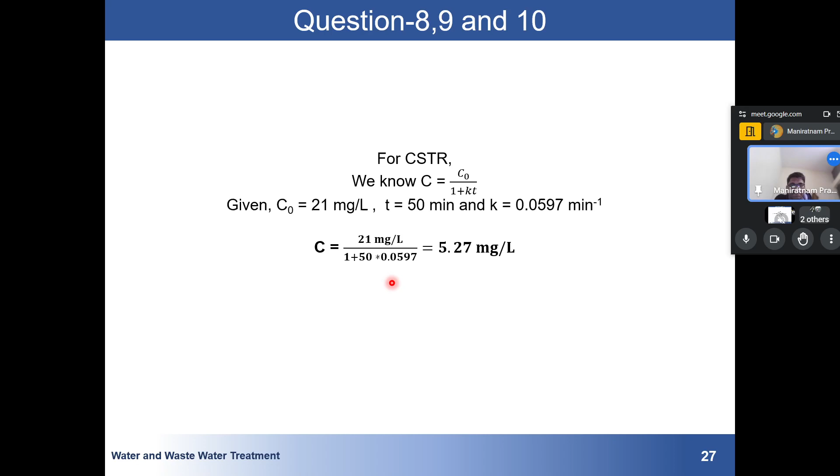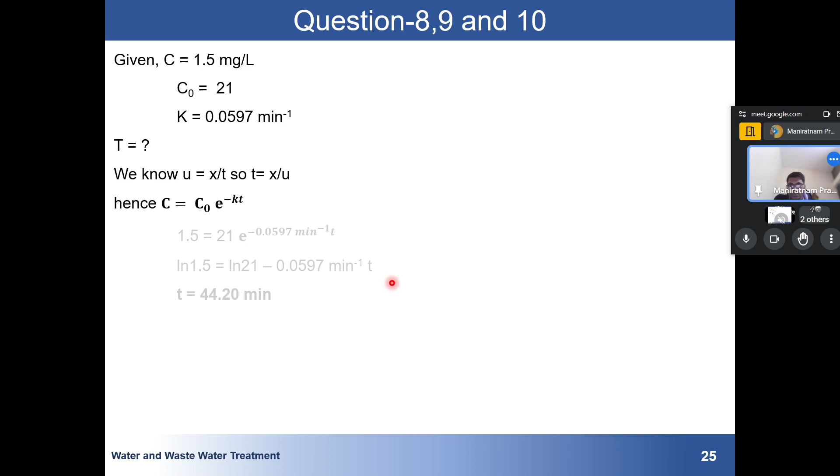You have the initial concentration of 21, time equal to 50 minutes, and k equal to this. So after 50 minutes, your concentration will be 5.2 milligrams per liter. This was a very good question; you can expect this type in your examination, and you have to solve it in this manner. For PFR you have two options: use the direct formula or derive it. If you can't understand this derivation, no problem, please go through the book. Okay, so this was the last question of the day.

I have already discussed first order, second order, how to use those equations, and the final order of the reaction is first, based on the r squared value.

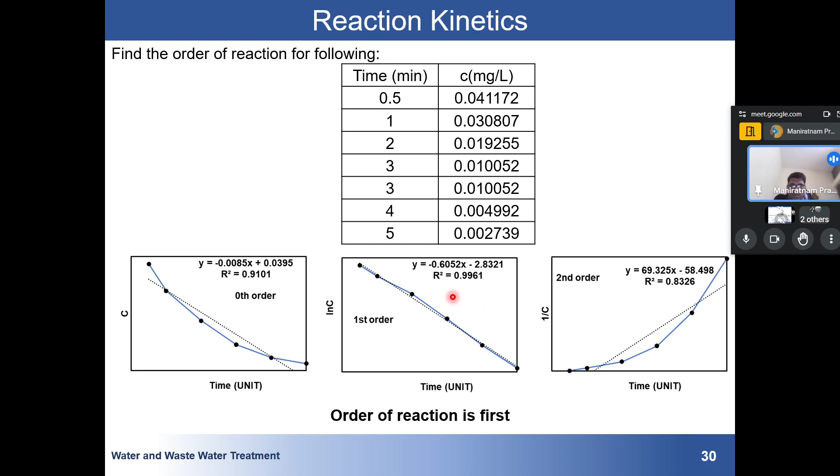So thank you. If you have any kind of question, you can ask now. Yes, yes, Varun. Sir, can you show the books again, please? Of course, just 1 minute.

So currently you are in BTech, miss, what are you doing currently? Sir, I'm doing a bachelor degree in waste management and water sanitation. From which college? Dayalbagh Educational Institute, Agra. Agra. Okay, in which year are you? I'm in second year, sir. Actually, sir, water treatment is a part of my course. That's why I'm taking this course. Oh, okay, so if you have any problem... I hope I was able to make you understand everything. Yes, sir. Sir, I have just one question. Can I ask? Yeah, yeah.

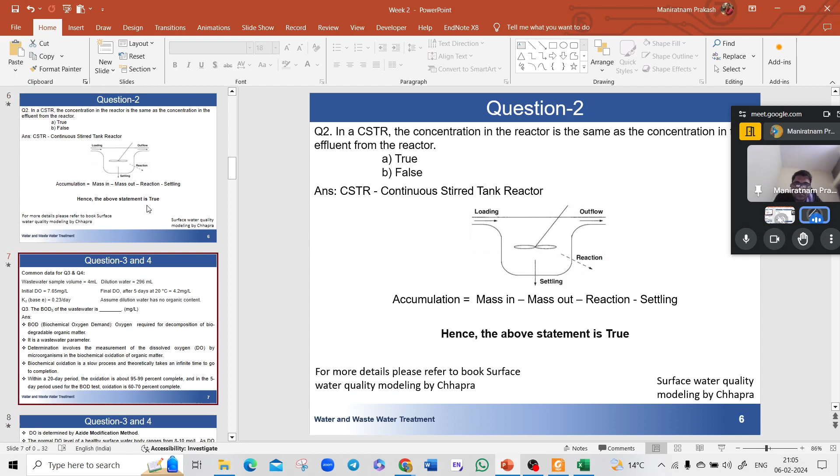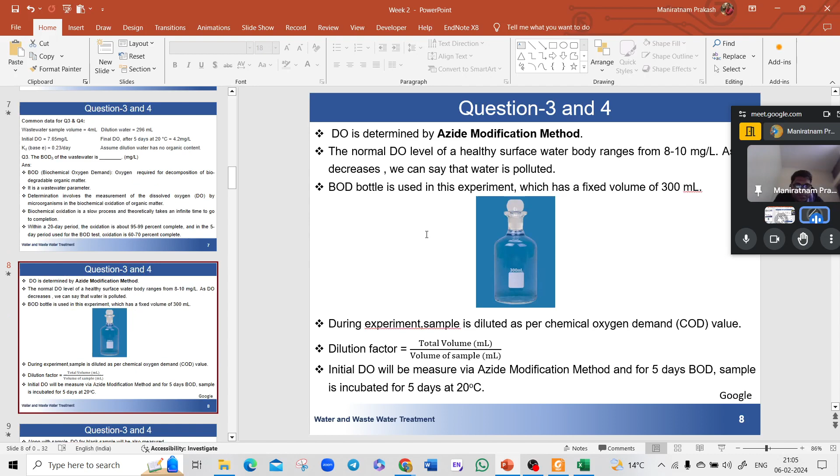So in the third question, actually, Velanki sir told us a formula: the total volume of the sample into BOD of the sample is equal to... Sorry, I did not get you. Speak slowly. Okay, sir. Actually, Velanki sir told us a formula which is Vm into BODm is equal to volume of seeded water into BOD of seeded water plus volume of sample into BOD of sample. But this formula isn't working for this question.

No, that question. See, he has discussed three conditions for performing the experiment. You are talking about seeding. Yes, seeding, sir. So seeding is a different case. See, depending upon the data of the question, you have to interpret what kind of formula you have to apply. So here there is no seeding. When performing the experiment, we do seeding generally when the presence of organic matter is very low in your system; we add a seed, that is external microbes. So that will enhance my DO reading.

Because suppose you are performing some experiment and your initial DO is nearly zero, obviously your final DO will also be nearly zero. So I will perform the experiment in such a way that my initial DO is very high. For that we do seeding. So in that case, the formula you are getting will be DO initial minus DO final. This term will be the same. What will happen is that in the blank term you will be multiplying by something called the seed correction factor. Am I correct?